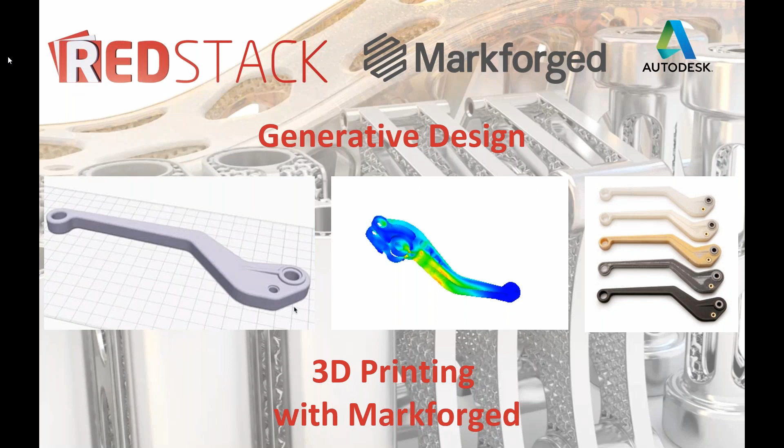Today's webinar will be on generative design technology with 3D printing based on Autodesk and Markforged technology. And I'll just go through the agenda. So the agenda today will be on what is generative design, who uses the software. We'll go through some case studies, and then a generative design software workflow to 3D printing. And we'll go through some composite and metal industrial 3D printing technologies from Markforged.

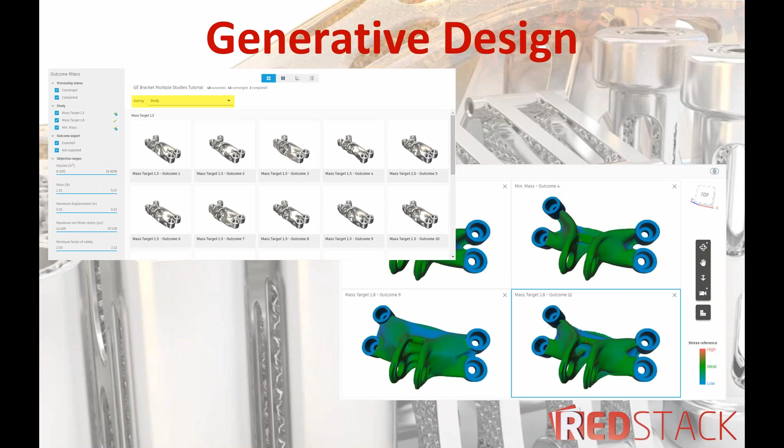So generative design software, these are some of the screen grabs from the software. So what is it? It's the process of taking a 3D CAD model, then applying parameters to that model, and then exploring what the outcomes are based on those parameters of that study to optimize the part.

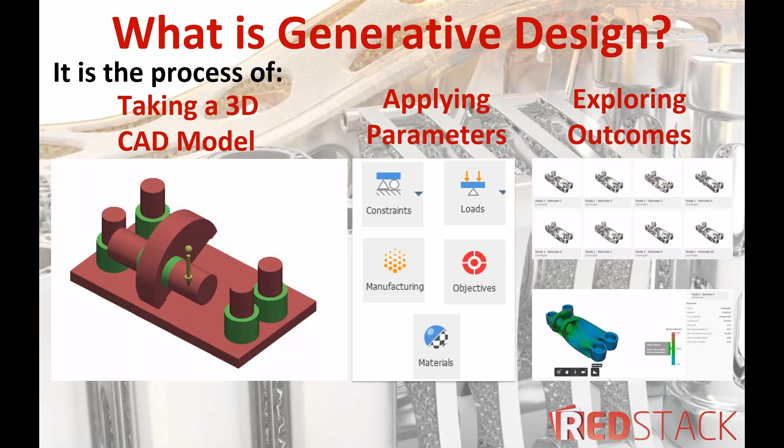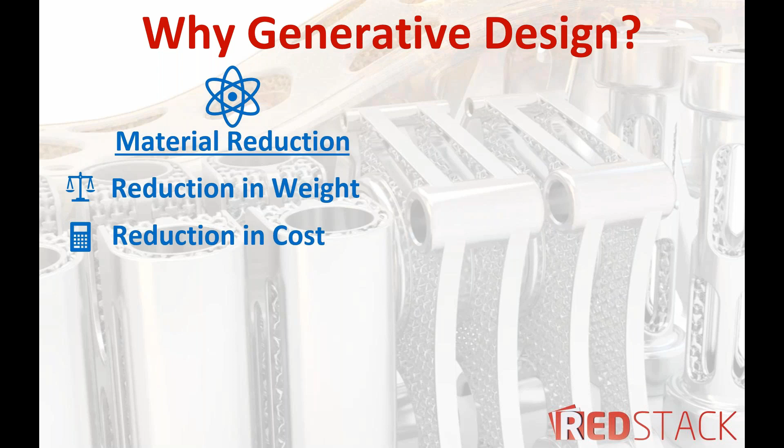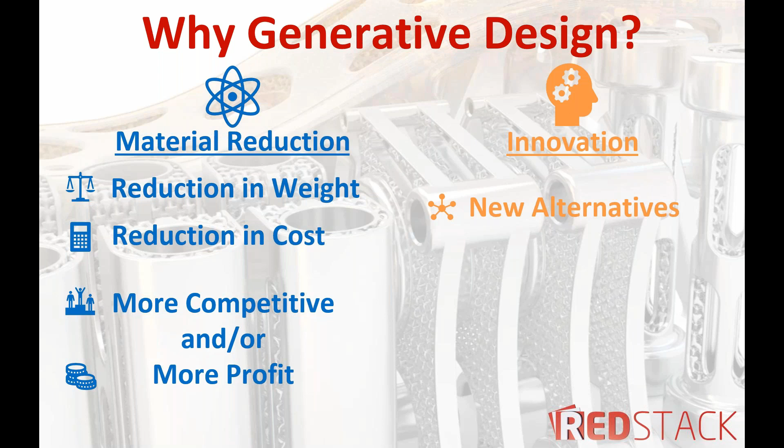So if you look at why we do it, material reduction. A reduction in weight is important for product designers and manufacturers. There's a reduction in cost also if you can reduce the weight and the material. You're more competitive, or you're more profitable. In terms of innovation, there are new alternatives you can explore and new technologies. You can now leverage new technologies with these generative design tools. So if you look at these 4 points that we covered, it's all about growth. If you're more competitive, you're more profitable, and you can explore new alternatives and technologies, companies grow.

So who uses generative design? Companies like Airbus, Under Armour, Stanley Black & Decker, BMW, and General Motors. So if we go through some case studies on generative design, you can look at Stanley Black & Decker as an example. So Stanley Black & Decker have a pistol grip crimper. It's used by utility workers where they crimp wires during repair and maintenance of overhead power lines. So as I said, the tool is used overhead, and with the overall weight being 7 kilos, the goal was to make the whole assembly lighter.

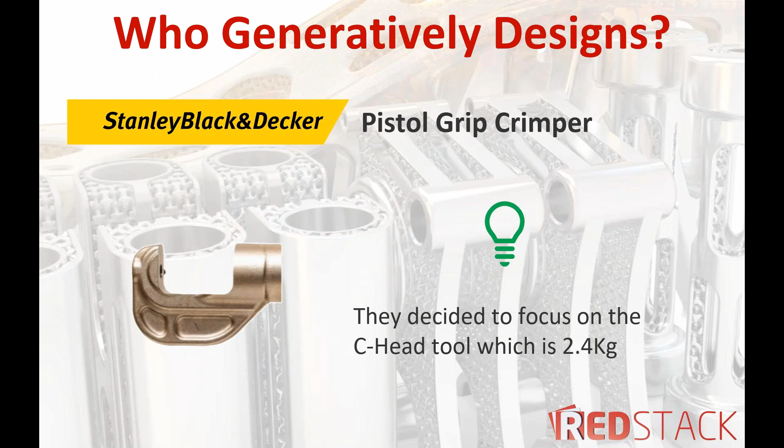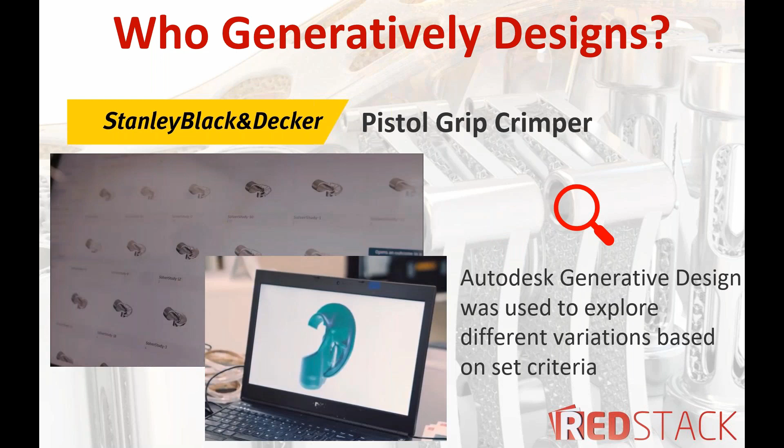So what they focused on was the C-head tool, which is 2.4 kilos of that 7 kilos. So they used generative design software to come up with new variations based on a set criteria. And based on that, they were able to reduce the weight of the C-head tool by 60%, from 2.4 kilos to 0.95 kilos or 950 grams.

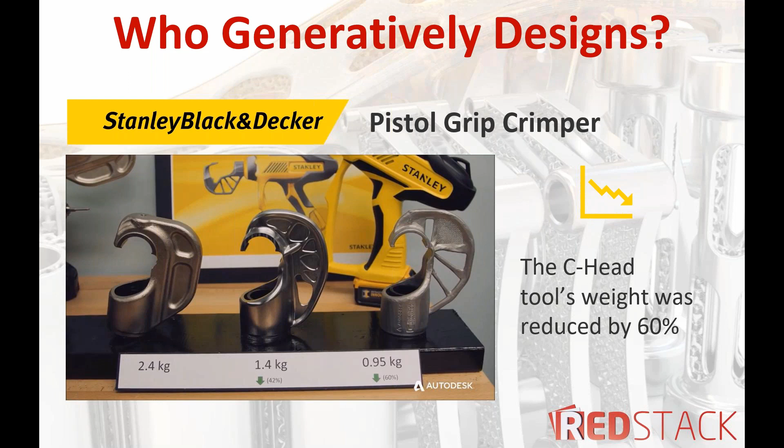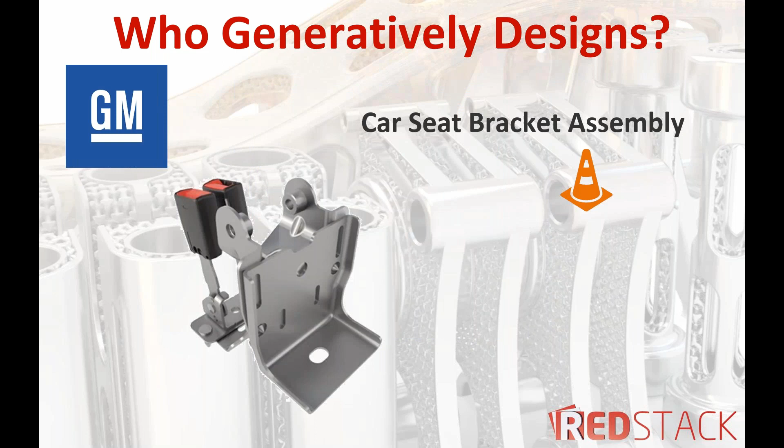A second case study for generative design is GM in the electric vehicles division. It's not just in electric vehicles, but in all vehicles, there's a car seat bracket assembly. So the EV division were looking at ways to reduce the vehicle weight and extend the mileage of the car. The car seat bracket assembly secures seatbelt fasteners to seats and seats to floors. And it's an 8-part assembly that's welded together. So with those 8 pieces, the goal is not only to reduce the weight, but also to consolidate these parts as much as they could.

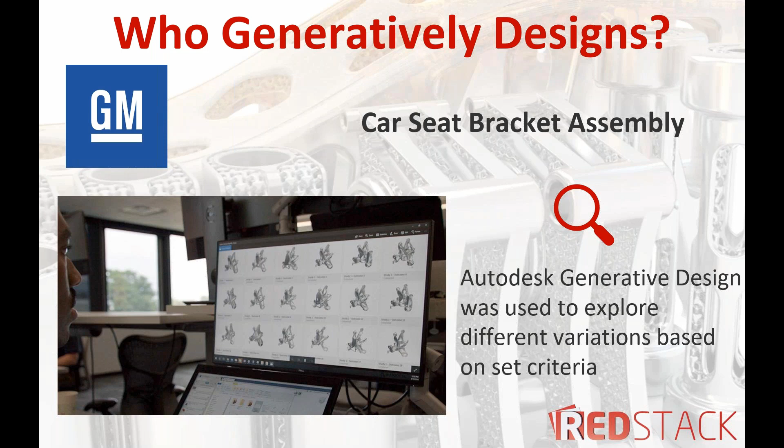So they used generative design software from Autodesk to, yet again, explore different variations based on a set criteria. And here's what they came up with using the generative design software. So the car seat bracket assembly is now a single part. So from 8 to 1 is pretty massive. It also reduced the weight by 40%. And it was 20% stronger than the previous design as well.

So a lot of benefits there, but the ancillary benefit of using generative design software was that it also reduced their supply chain costs. They don't have to go to market and get 8 pieces produced and sent back, and then the assembly costs also. So there are some flow-on benefits that were realized, and now GM are looking at what other parts they can use generative design on to reduce the overall weight of their parts.

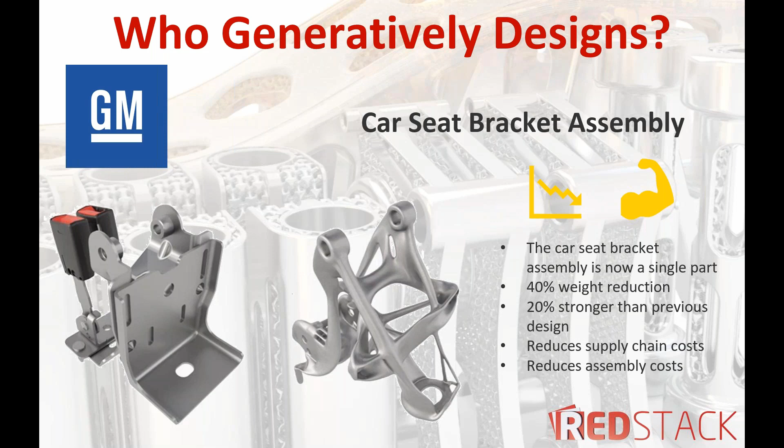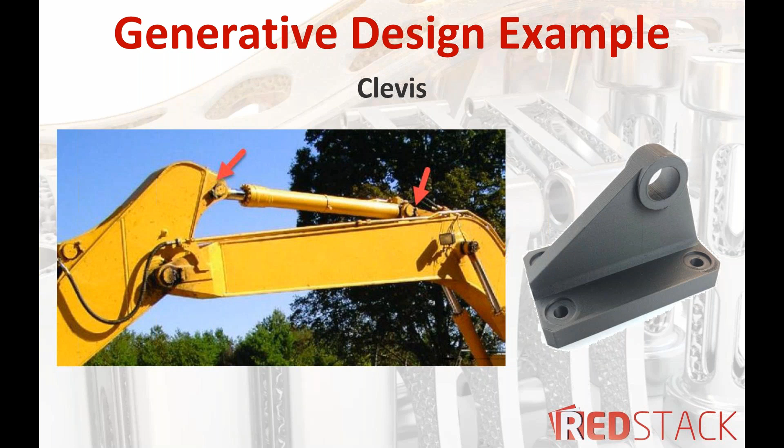So RedStack, being an Autodesk partner and also a Markforged partner, created an example of a Clevis, which is used in many applications in industrial and commercial products, in hydraulics and pneumatics. So we used the Clevis and tried to optimize that. When we applied the material stainless steel, it was 1.5 kilos, and the rough dimensions of this Clevis were 120 by 72 by 87 mil. It's typically welded from 3 pieces. Then the holes are machined into it.

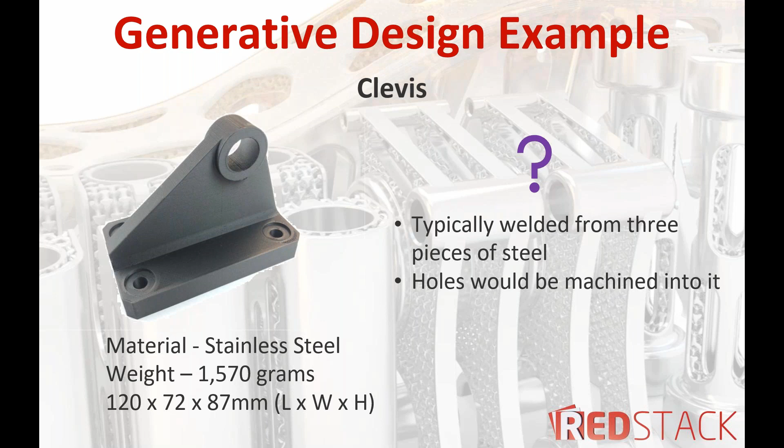In terms of setting up the study in the design software, we set up a generative design study.

Sorry, we're having technical difficulty, just bear with me.

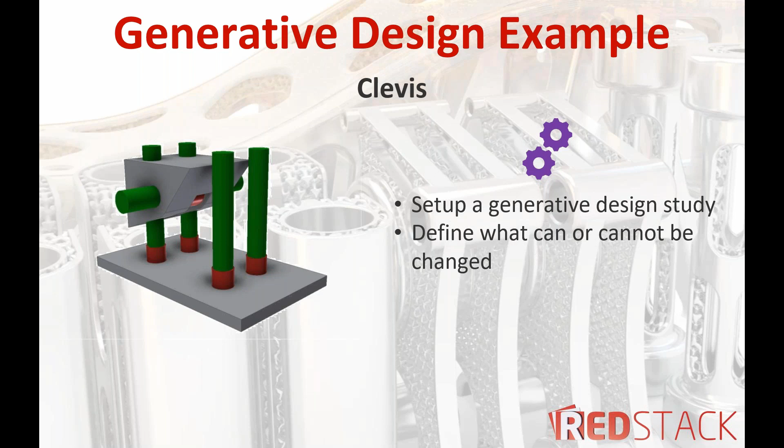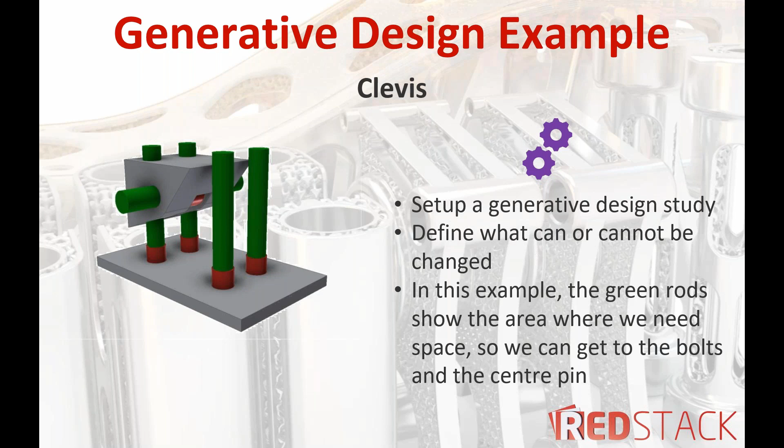So we've set up a generative design study, and what you do in the software, you define what can or cannot be changed. So in this example, the green rods show the areas where we need space so we can get to the bolts and the center pin. So when we ran the study, the software shows thumbnails of every possible alternative. In this study, it showed 35 different alternatives that we could choose that met the criteria.

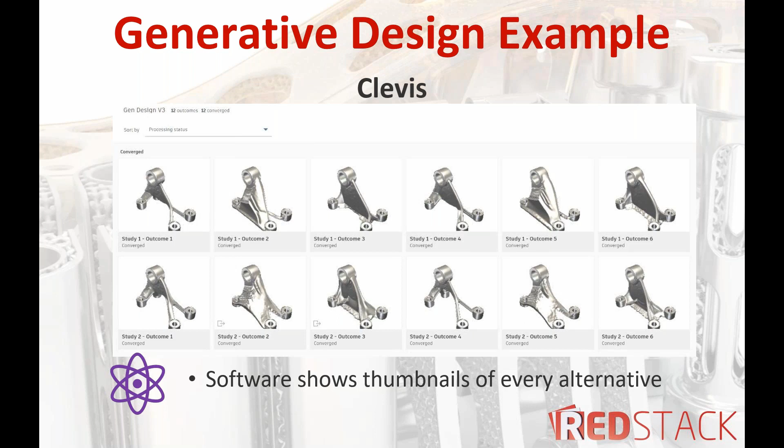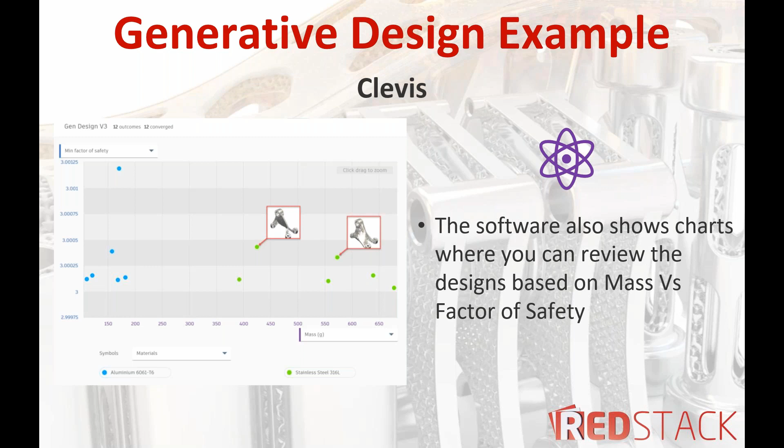There's also a chart where you can review designs based on mass versus the factor of safety. And once the design is chosen, you can clean up areas before 3D printing them. So you can use your CAD software or an STL design software like Meshmixer. In this example, we used, I think, a combination of Meshmixer and Fusion 360 to clean up the final part.

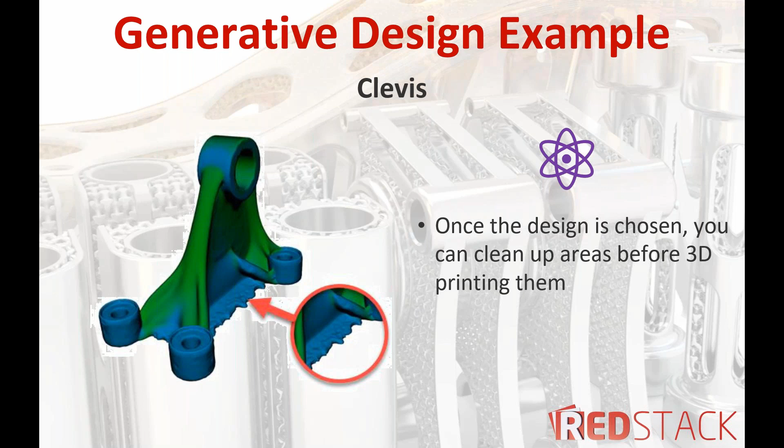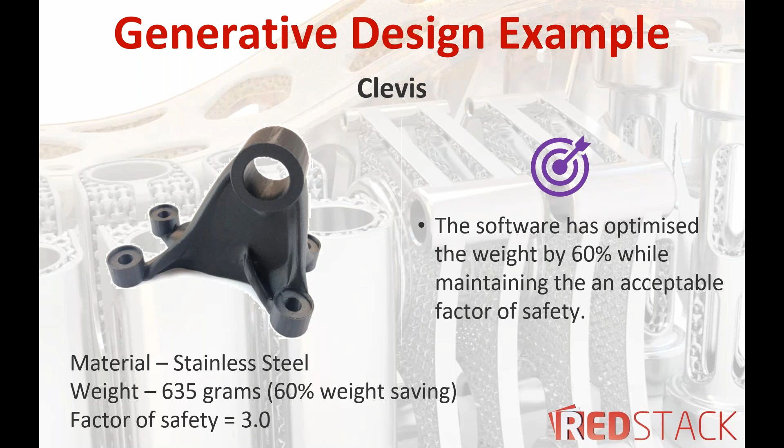So this is what the 3D print looked like. When you apply stainless steel as the material, there's also a 60% weight saving compared to the original design. And the factor of safety is still 3, so it's quite acceptable.

So to be able to design the part using current 2D and 3D CAD tools would either be very difficult or near impossible to produce such a design, especially in 2D. And then on top of that, to manually explore and validate so many different alternatives, like 12, is impractical for an engineer. So these are the benefits also of using generative design software to do the calculations and thinking for you, and then taking that optimal design and putting more effort into it and refining it before manufacture.

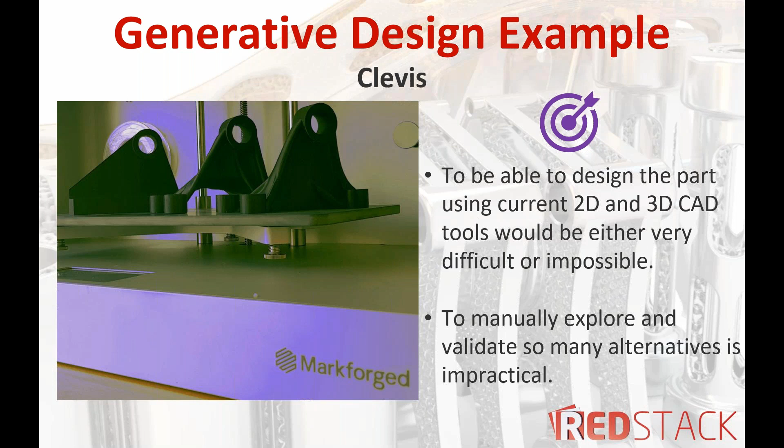So what kind of software does generative design? Fusion 360 is one application. The Product Design and Manufacturing Collection has both Fusion 360 and Inventor Professional. And Inventor Professional also has a more simplified version than what's in Fusion 360, where you can set up a design study and it'll only give you one alternative. It'll optimize the design, and then you can refine it further.

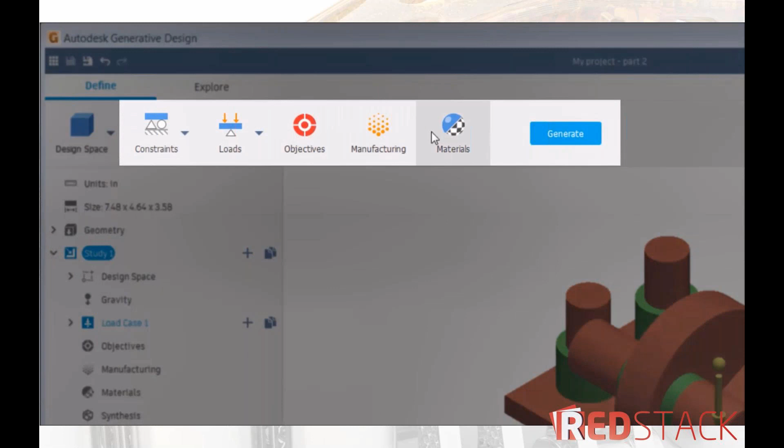So let's look at what the generative design software looks like in Fusion 360. I'm just going to play a video. Hopefully it plays quite smoothly. So in this example, we're setting up a study here. After importing the STL file, there's 5 things you need to do. You need to define the constraints and loads. You've got to specify the design requirements, meaning what are the objectives, the type of manufacturing and materials.

So if you look at applying constraints, you can apply a fixed constraint to a face and lock it down, or a frictionless constraint, which will prevent the face from moving or deforming in the normal direction of the face. You can apply a load or loads. You can apply a pressure, force, or moment load if you want to simulate the effects of a torque or bending of your model.

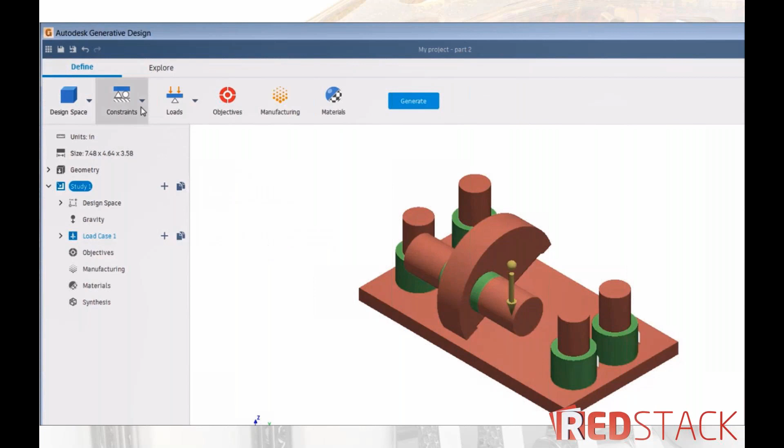Now, this is where you specify design requirements as well. So with the objectives, there's two options as well. Look, I think I'll just wait for the software to catch up here.

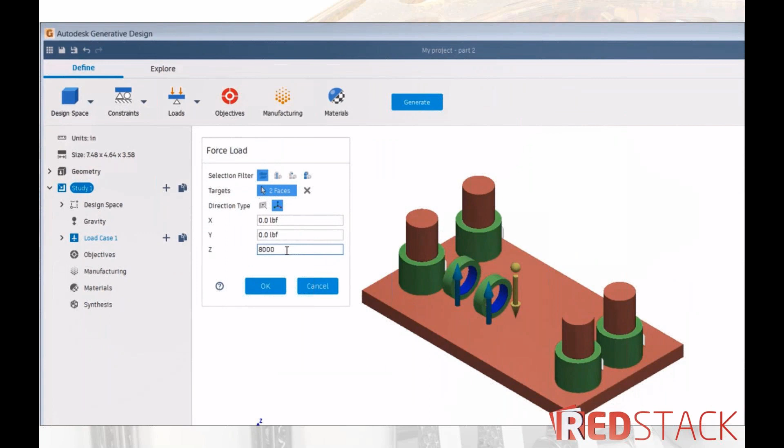So yeah, as I was saying, you can apply pressure, force, or moment load if you want to simulate effects of a torque or bending the model. So this is where you specify design requirements. With objectives, there's two options. Do you want to minimize mass or maximize stiffness while maintaining a factor of safety? If it's stiffness, you would need to specify the mass target.

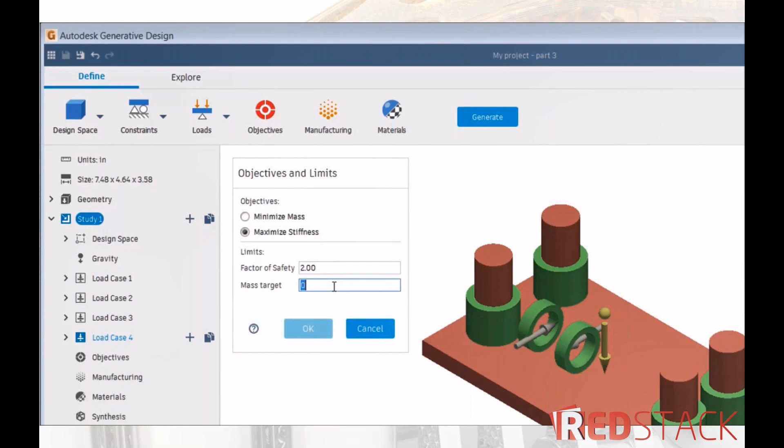So you really want to make sure your parts that you're designing meet the factor of safety, and when the final design is optimized, you know what the targets are, to get a good outcome, I suppose. So when it comes to manufacturing, it refers to additive manufacturing. How much overhang do you want? With also a reference to supports, and what is the minimum thickness as well.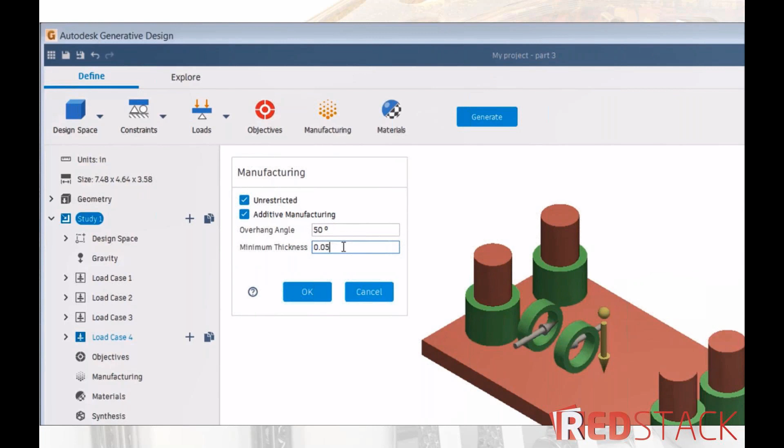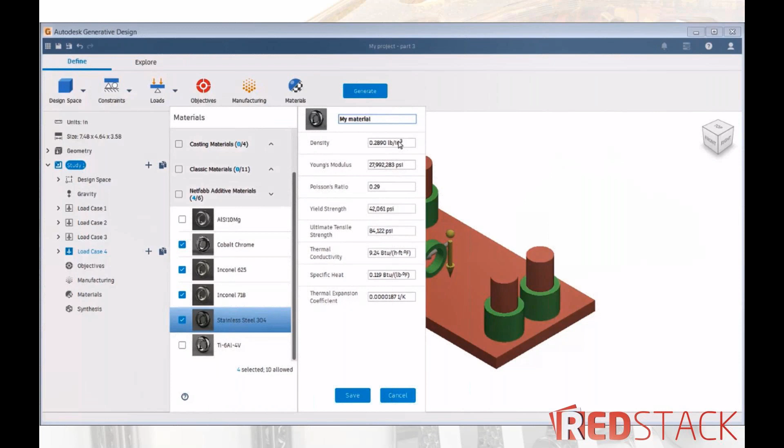So in here, we're putting the overhang angle of 50 degrees, and we want a minimum thickness of 0.05 in the software. This will give us an acceptable outcome. So materials is pretty self-explanatory. You choose what materials you want to use. Once you choose what kind of materials, it gives you some specifications. You can create materials as well, so if you're using composites or some special filaments or things like that when 3D printing.

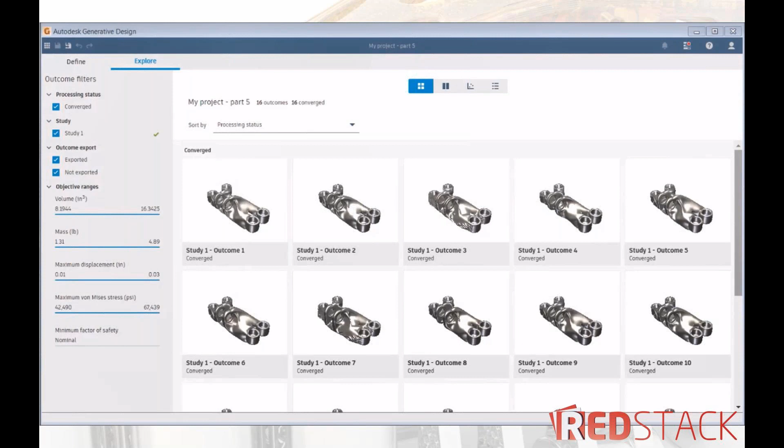So I guess now all we need to do is generate a study. With Autodesk Generative Design platform, you need 25 cloud credits to run a study, so each study is about $40. So the computer comes back with a bunch of outcomes. On the left, you have a slider bar with ranges, with metrics like volume, mass, displacement, and stress. On the right, you have thumbnails with additional information. The video doesn't show it, but there's pretty insightful comparison tools to compare one outcome over the other as well. So that's a brief overview of the generative design tools with Autodesk.

So I'm just going to get into high-speed desktop and industrial 3D printers from Markforged. Markforged is all about unlocking the next 10x innovation in design and manufacturing. And what they mean by 10x is they refer to comparing their 3D printing metal technology compared to others.

You know, 10 times safer, 10 times lower cost, and 10 times faster. So Markforged have an industrial 3D printing platform where they supply cloud-based software, which can also be supplied on premise, a full range of industrial 3D printers from desktop to industrial range, and purpose-built materials for strong parts, not only in composite, plastic, and metal.

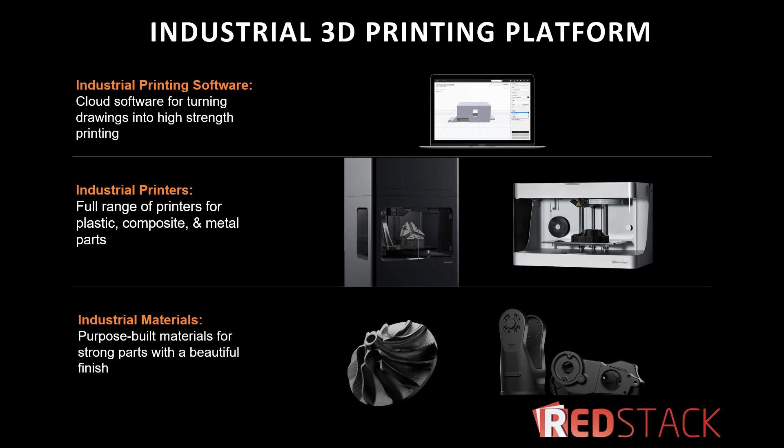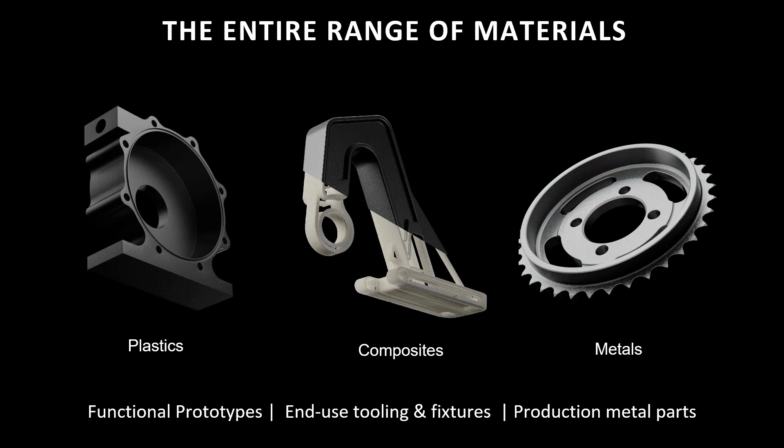So what can they be used for? Functional prototypes, end-use tooling and fixtures, and production metal parts. So if you look at their range of printers, you have the desktop range, and that starts at the Onyx One. Onyx One prints in a material called Onyx only, which is nylon with chopped carbon fiber. It's around 40% stiffer than ABS. It prints in 100 micron, and the build size is 320 by 132 by 154 on the whole desktop range.

If we go up to the Onyx Pro, it will print in Onyx and then continuously reinforce that with fiberglass. Fiberglass has an MPa of around about 240, which is close to or above that of mild steel. So you could potentially print in Onyx with fiberglass, create a prototype, and test it with loads that would give you a similar performance to that of mild steel without having to create molds, dies, or CNC a mild steel part.

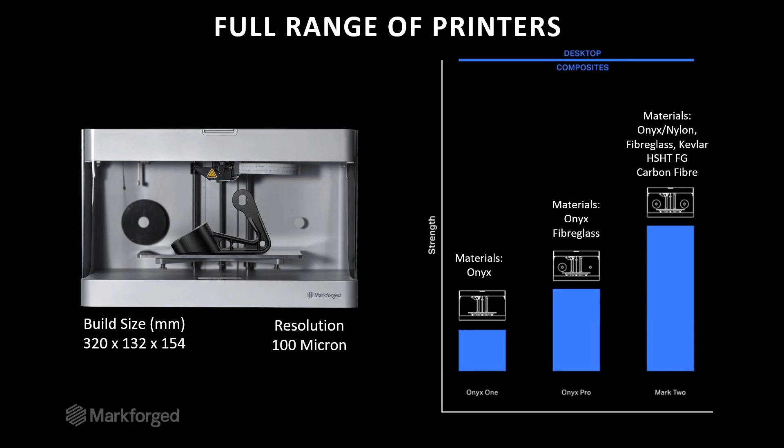And then if you move up to the Mark Two, you can choose between Onyx or nylon as a base material, and then continuously reinforce that with fiberglass, Kevlar, high strength, high temp fiberglass, which is stronger than 6061 aluminium, and carbon fiber. If we move on to the industrial range, very similar concept. The X3 does Onyx, the X5 does Onyx with fiberglass, the X7 does all materials. You can also print in Onyx and nylon rather than a choice of one or the other.

The build size is larger. We go to 330 by 270 by 200. It'll print down to 50 micron. It'll do 100 micron. I think it also does 200 micron. But the biggest thing that the industrial has over the desktop is quality control systems. It's got lasers to flatten the bed offset. And then when it does the first couple of prints, it also runs a laser check to make sure that the first couple of layers are level, and then it compensates for that.

The X7 goes one step further, where it'll do a laser scan midway through the print, where you can then bring it into the software, overlay that with a 3D model, and check it to make sure that it is accurate. So when it comes to a workhorse that prints all day, every day, and quality control with repeatability, you would look at the industrial range as opposed to the desktop.

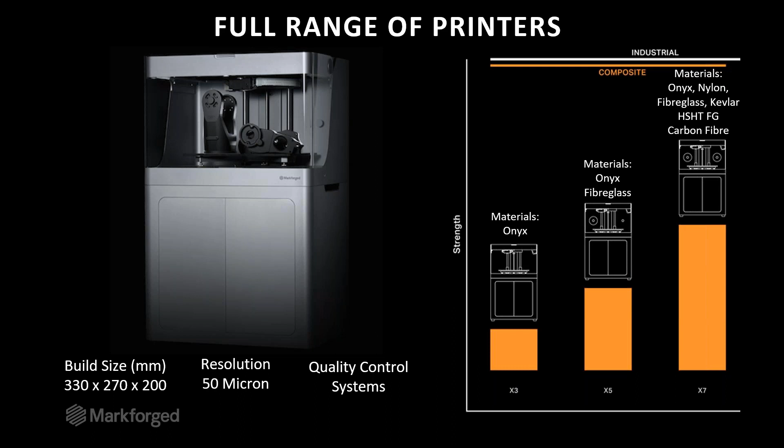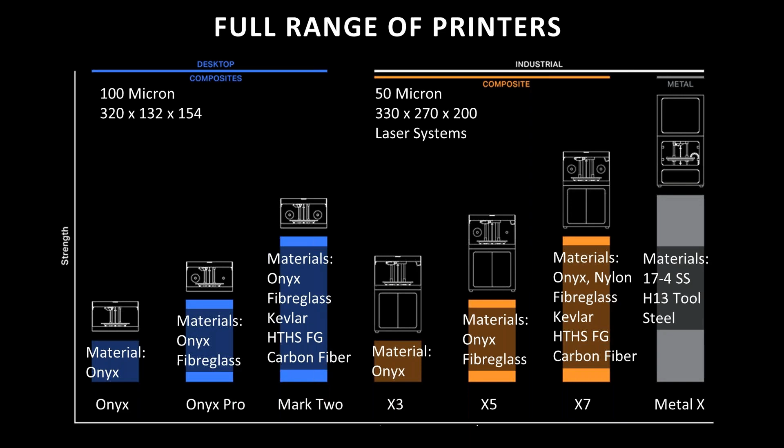So you get cloud software, Eiger software, with the printers free of charge, whether you buy 1 or 1 million printers. You can also get local storage free of charge. If you are a defense customer or have very IP sensitive data that you don't want in the cloud for whatever reason, you can purchase on-premise software and have it off the grid, I suppose.

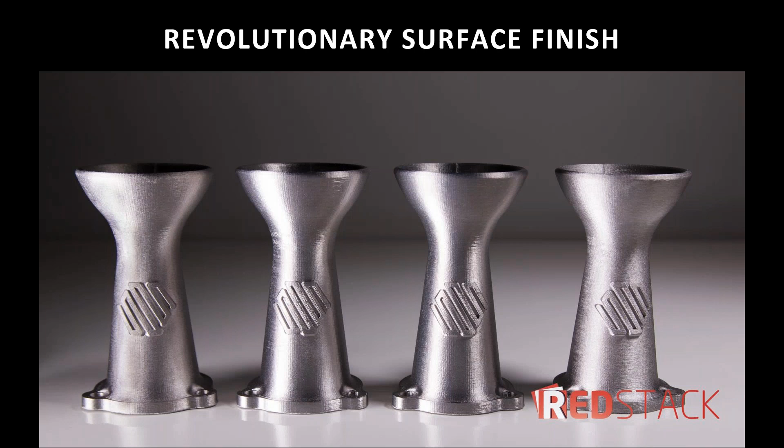So what sets Markforged apart from other 3D printing technology is the revolutionary surface. By optimizing the hardware, software, and materials together, they set a new bar. And it's highly repeatable extrusion, which means a great surface finish and the key to dimensional accuracy in parts that fit perfectly in your application.

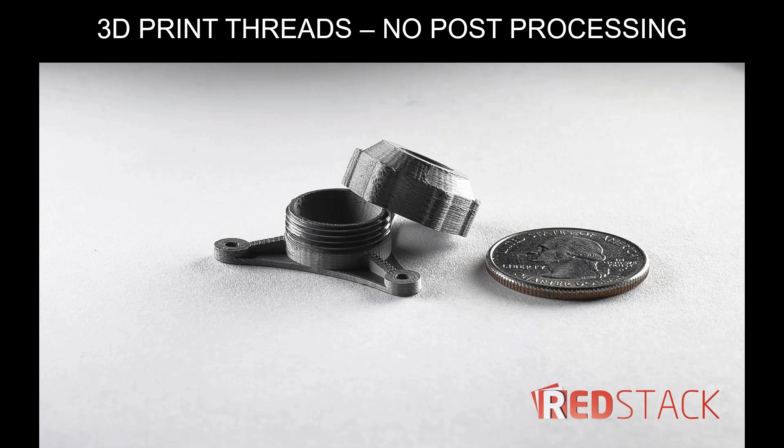So these ball joints are printed in 2 separate parts on 2 separate machines, and they just screw together. Since it's 17-4 on 17-4, they put a dab of lapping compound to prevent galling. So anyone can print large threads, but only Markforged has the accuracy to print small, high tolerance threads, I think down to M3.

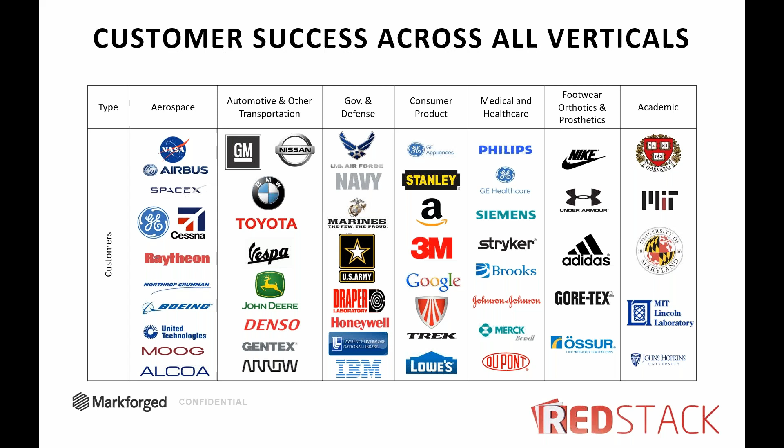So Markforged have a global fleet of installed printers all around the world. There are customers in many different verticals. And when it comes to outsourcing parts for CNC, if you did it in-house with 3D printing with Markforged, you'd save a lot more money.

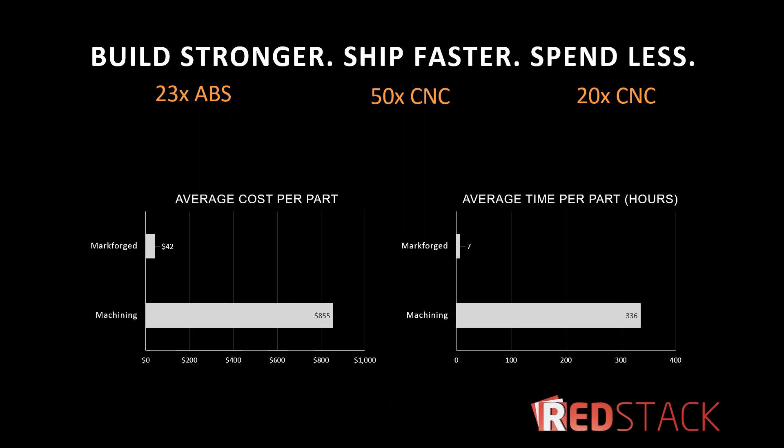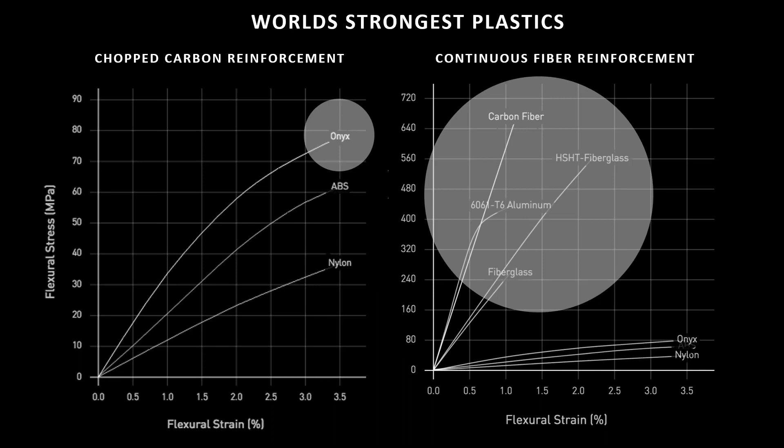This data was put together from typical outsourcing costs versus people who were printing on the Eiger software. So if we look at chopped carbon reinforcement, you'll see on the left there that the Onyx material is a lot stronger than ABS or nylon. And on the right, when we start continuously reinforcing that fiber, the carbon fiber and high strength, high temp fiberglass is much, much stronger than aluminium. And the fiberglass, as I said, was up around the 240 range, and it just blows away what you can do in ABS printing.

As I was saying, with the X7, it's the only Markforged, only 3D printer that has quality control systems for under $1 million. It's got a full sensor suite, including motor encoders and a calibration laser. So it's so accurate it can compensate for single-digit changes in room temperature. And as I said, the X7 features laser inspection that scans parts mid-print to ensure dimensional accuracy. And that's really for the most critical tolerances.

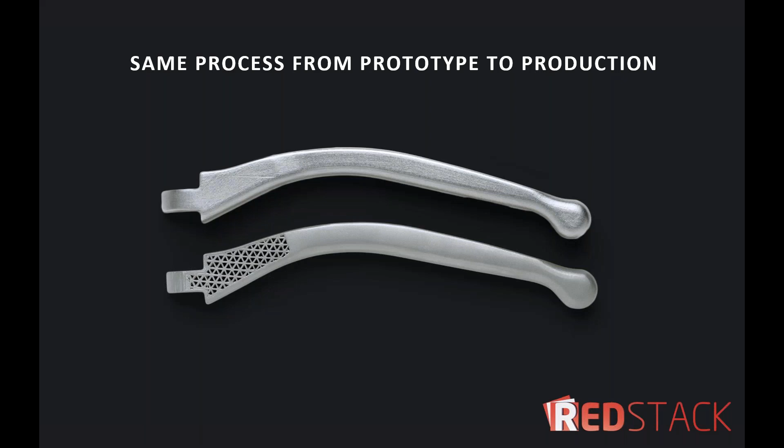So if we get to the Metal X and the technical specifications, sometimes you just need metal. So when your application requires isotropic strength, high temperature resistance, when you think about injection molds and the harder surfaces, you want to print in metal. What's great about printing in metal, it's important because your prototype and production solutions should use the exact same technology.

In many cases, people use one technology for a prototype and a different technology for the end part. So every process requires different part design, be it CNC machining, injection molding, casting, or different 3D printing solutions. For example, in the ADAM process, which is Markforged's metal printing process, you can produce parts with closed cell infill. You can't do this with any other powder-based 3D metal printing solution.

So this brake lever here has a 50% triangular infill throughout the part, making it lighter. So that's important for a motorcycle. So once you validate the part for your application, you don't want to change the structural design and use a different method. And that's what's so great about Markforged metal printing. So they designed the ADAM process based off a high volume production technique called metal injection molding, or MIM for short. So iPhone parts, hip inserts, and FAA flight certified hardware are made with MIM every day.

So at Markforged, they print their own demo parts, which get sent to partners like us and customers. They make about 11,000 parts per month on a fleet of 30 printers managed by one operator who's not a trained engineer. So they'd be mass producing these ball joints for sample parts. Each of these ball joints takes about half an hour to print across 2 printers and costs around $1.95 US to print.

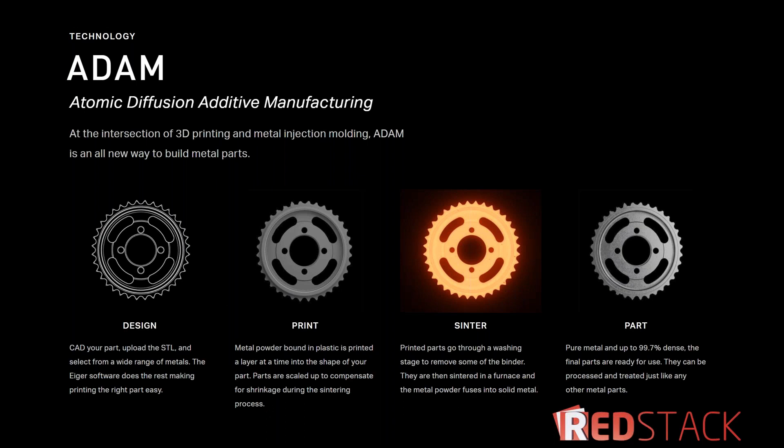So ADAM stands for Atomic Diffusion Additive Manufacturing, and at the intersection of 3D printing and metal injection molding, ADAM is the all-new way to build metal parts. There's a 4-step process. It starts with your CAD design. You design the part you want and you upload the STL to the Markforged software. You then print the part out of metal powder, which is bound in plastic, a layer at a time. And then parts go through a washing step and then are sintered into their final metal form, where it turns out up to 99.7% dense, and it's ready for use.

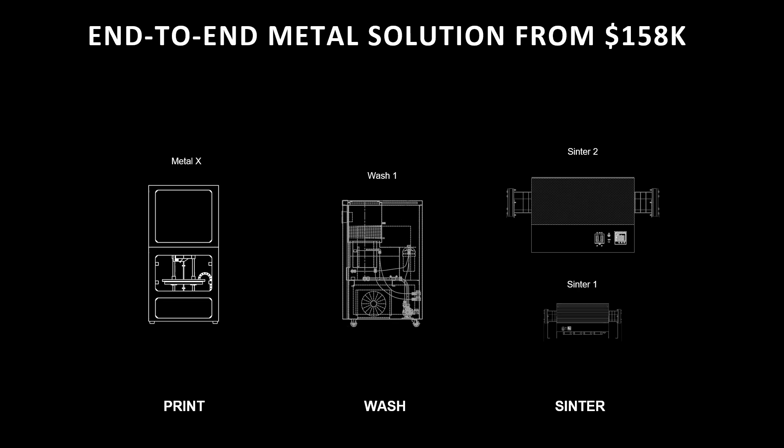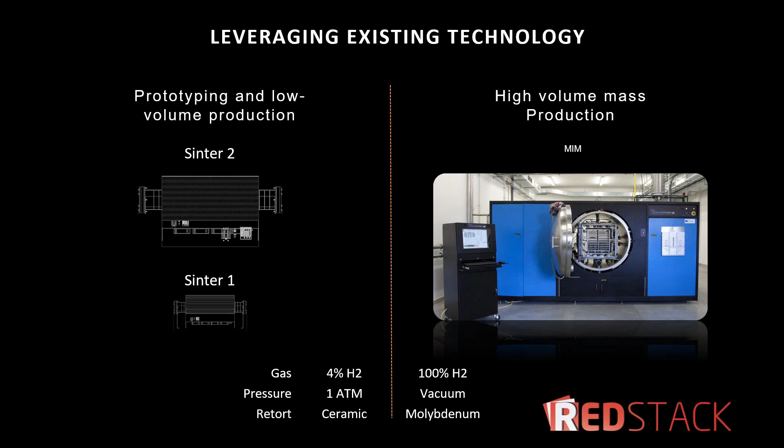So if you look at an end-to-end metal solution from Markforged, it's the Metal X printer, it's the wash, and the sinter. You can choose from a Sinter 1 or a Sinter 2. Or you can go to high volume mass production using a MIM. So metal injection molded furnaces are designed to keep up with the speed and volume of injection molding. They handle incredible volume and are used for aerospace, medical, and automotive applications.